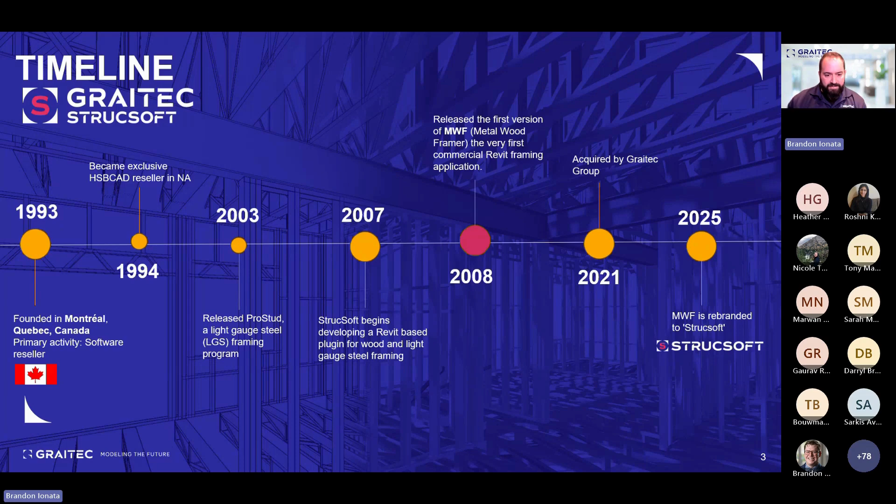In 2008, of course, when the software came out, the housing market completely crashed. So we lost a good portion of our potential customers. But we found our footing in the BIM market. Early adopters being large light steel framing subcontractors, primarily interested in coordination of interior wall partitions such as healthcare buildings, casinos, and hotels. So less of the offsite. There was some panelization, but we didn't really see many modular companies look to us immediately.

So since then, we've been working to plug a lot of the gaps I mentioned earlier in the software ecosystem, and partner, one partner at a time, excuse me. And I really want to talk about this, and I want to say partners and not customers, because in this industry, there's no off-the-shelf software that will do what today's builders want and need. As a software developer, we definitely try to get close. But in reality, the offsite industry is not standardized.

Materials, machinery, processes, they're all changing always. They're always being reinvented. So as software editors, it means we stay very, very busy. Our partners rely on us to keep the lights on and to create software that fits and accelerates their building standards and processes, automates their workflows, speaks to their machinery, and in some cases even sells their products. So really, this is a partnership that exists between us and our clients, and it's there to help them push the envelope on what they can achieve, basically, move their business forward, or at least help to. So I'll talk a little bit about the solution.

So as Canadians, we see that the digital transformation in the offsite industry is already on strong footing. Most of the Canadian offsite companies we're engaged with have already adopted or are in the process of adopting standard industry software. I'm speaking, of course, of Autodesk Revit, as it's the predominant package which offers offsite builders a lot of advantages: easy collaboration, data-heavy modeling, visualization, and a steady stream of proficient professionals entering the job market.

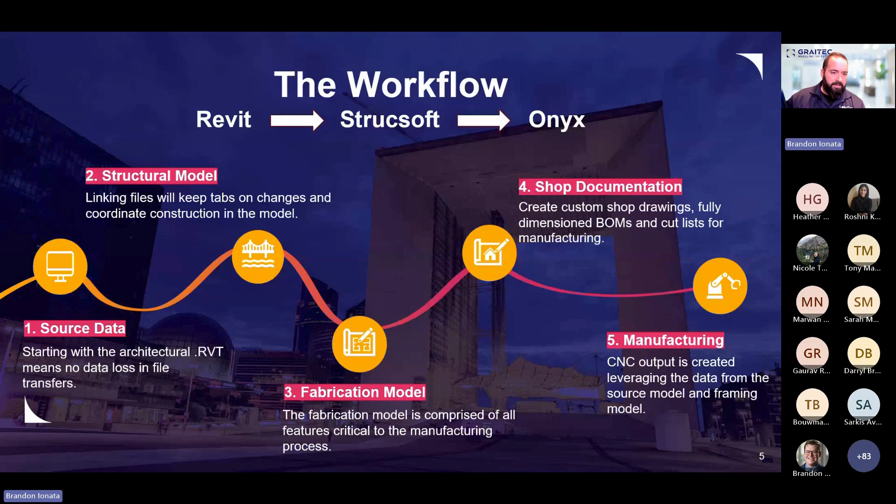So as mentioned, the source Revit model and any linked Revit files are used together to input all framing data directly in the Revit environment. Since Revit is a sandbox, structural, architectural, and MEP models can be linked to handle coordination, avoiding any errors before the fabrication begins. Automations can be easily created and create all level of detail from framing conditions, including hardware such as clips, hold downs, lifting toggles, and then document all of the components for fabrication through automated shop drawings, bill of materials, and cut lists.

All this data can be templatized and used from project to project, essentially becoming a set of company standards, building efficiency within the company. So we're taking care of a lot of the repetitive motions. And of course, certain aspects of engineering can be done. We do handle light steel truss design, which is pretty unique in the industry. And we're continuing to push forward towards a full structure FEM analysis engine in the future.

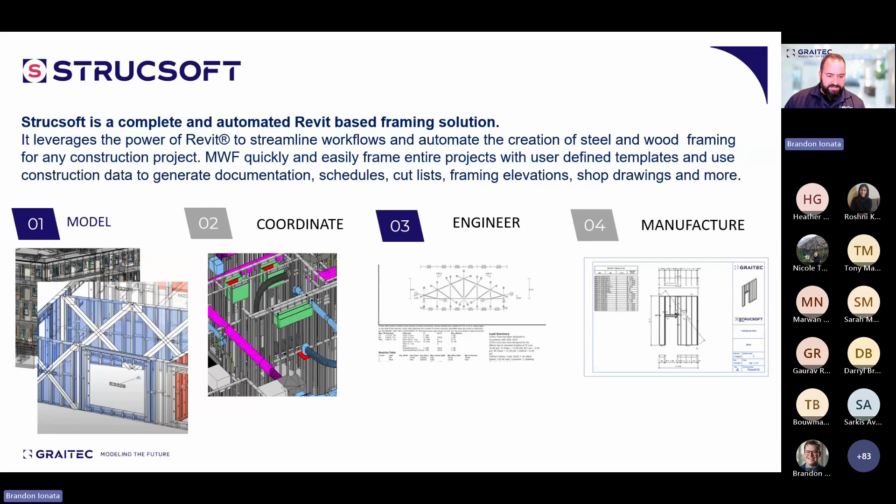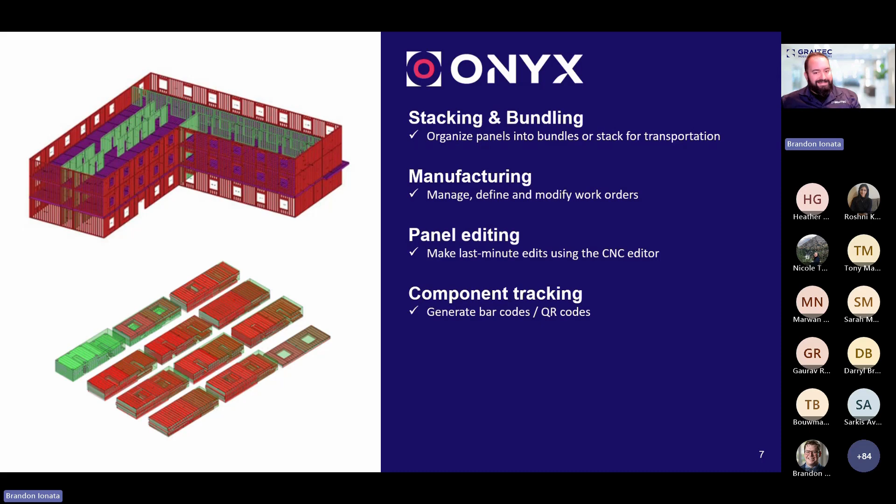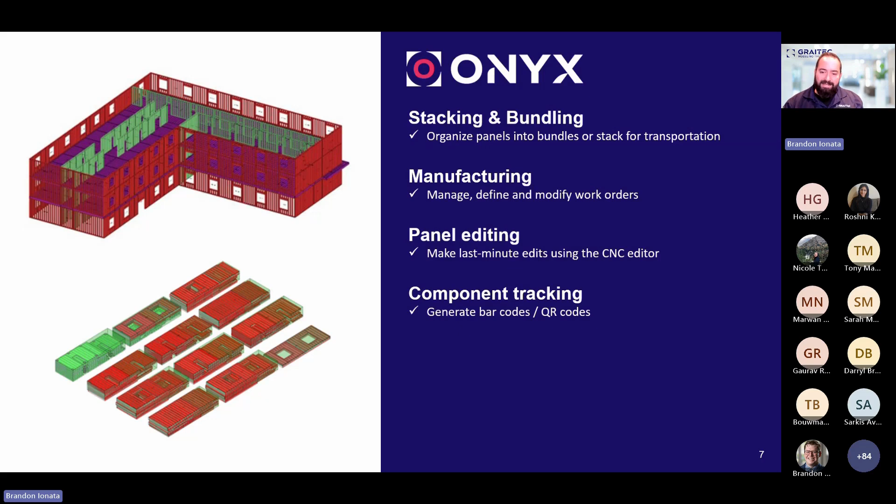So anyone that knows Revit knows that fine details such as light steel connections, nail lines, routing lines, and sheathing, and even component management for delivery is out of scope of your typical Revit model. It was a tough lesson for us to learn about 10 years ago when we tried to manage all of this in Revit. So what we did to overcome some of these issues is basically create an entirely new platform, once again leveraging the Revit data source, but allowing us to manipulate it in a lightweight cloud environment. We found that at most shops, the people needing to fine tune and schedule output files for manufacturing weren't the same people driving Revit. So we created a light browser-based system to manage this data.

And what it allows you to do is basically make edits to operations and wall panels that are edits specifically to the CNC code. And we allow you to do this visually, so you're not trying to sit there and edit individual lines of code in a text file. We can also add panels to work orders and roll orders, essentially allowing the user to schedule the order of operations for their manufacturing facility, as well as the order of erection and delivery to site. And of course, we're able to handle printing alphanumeric barcodes and exporting all of this data to CSV, text files, and I think over 24 now different CNC machines.

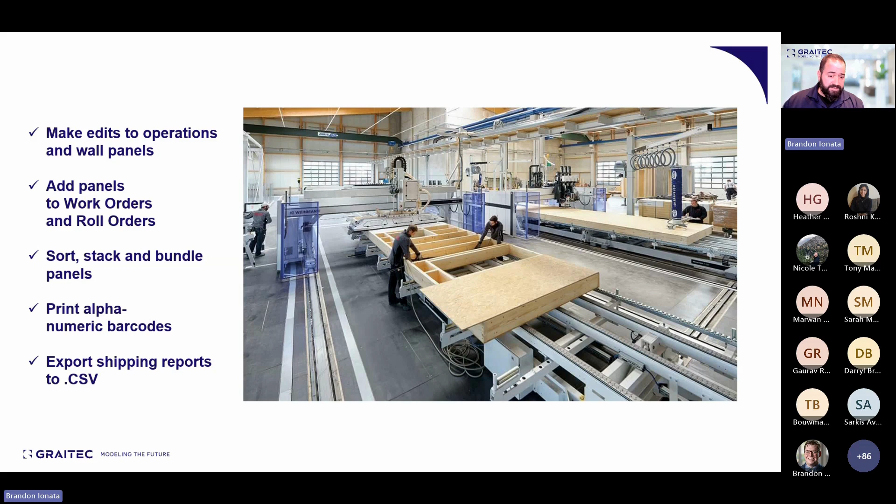So I'll talk to you about a few customers. Some of these are some of our largest customers, and it's just to show you a little bit what is capable in an offsite construction software like this. And all of these customers do build offsite.

So the first is an amazing partner that we're heavily involved with. They're called Digital Building Components, or DBC for short. They're a subsidiary of one of our earliest adopters, with whom we've been working since 2008. As a company, DBC focuses on delivering an engineer-to-order finished exterior system that is high performance and quick to install. Their projects are typically big, hundreds of panels big, and what sets them apart is their process and their people. They're emphasizing the creation of a fully coordinated 3D model in Revit, which feeds data downstream to their machinery and shop floor.

So their innovative process keeps errors in the field to a bare minimum. Their factory processes focus on safety and efficiency, and these guys can churn out thousands of panels in a typical year. What's amazing about a partner like DBC is they're always pushing the envelope on technology, streamlining design to reduce their design phase by almost 80%, while increasing level of detail in their models.

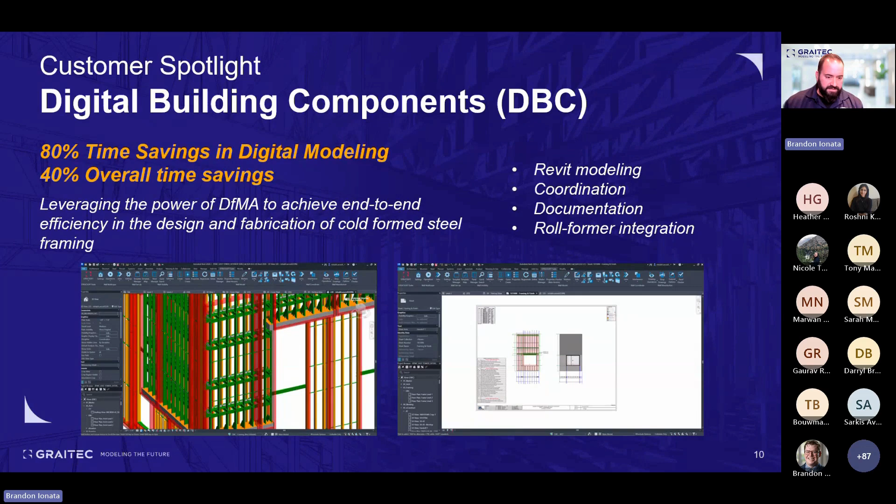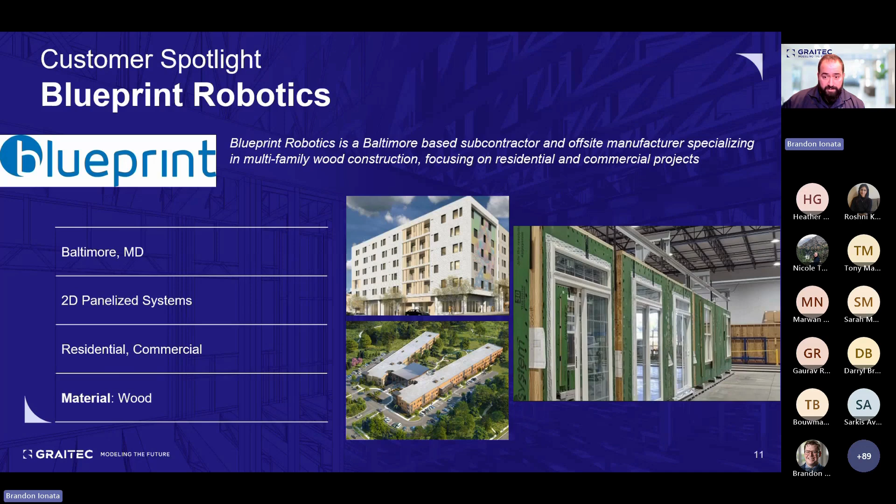And they had a particular challenge for us, which was to flip the switch on their old software system during a live project. And this is what I was mentioning earlier about being that trusted advisor and really being a partner, not just a solution provider. We actually put more than 25 developers, technicians, and project managers on the project, transforming their DFMA process in just months. Moving them from their old system, we enabled them to increase productivity 2.5 times.

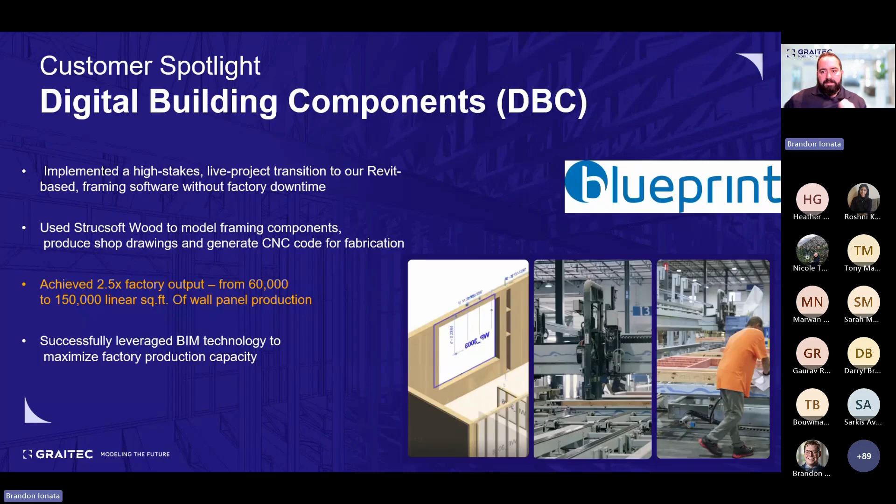The last example I'm going to show you is one to help people think outside of the box. We tend to think of offsite structures as quite bland. We can see that, in this example, obviously there's no limitation. So obviously the Las Vegas Sphere, I think a lot of people know about this structure by now. Our client, Performance Contracting, completely coordinated and detailed the project to be output onto HCL roll formers.

So just some stats from the project to show you the scope of what was done. More than 8,000 total wall and floor panels were modeled. 132 separate wall types, 33 separate floor types, and more than 173 unique opening configurations were used in this project. So quite massive.

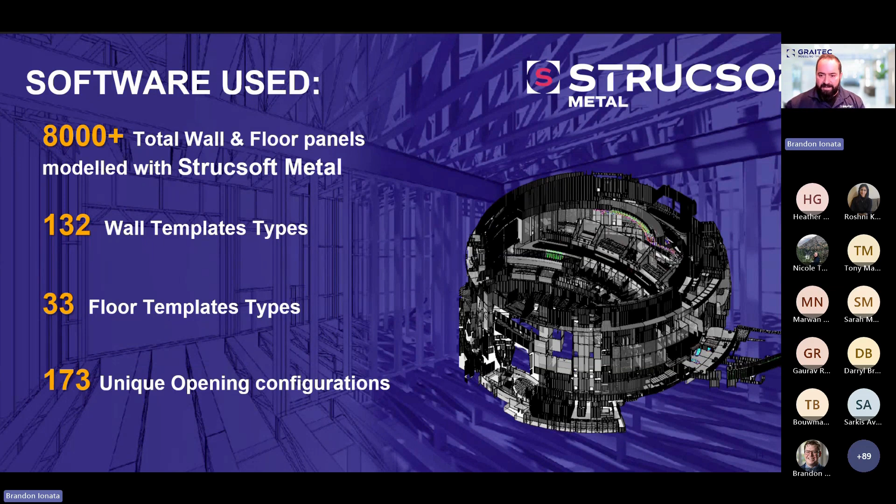Of course, full disclosure, these examples are not Canadian companies, unfortunately. Due to time constraints, I didn't get the releases I wanted to speak about some of them. But we did bring with us one of our innovative Canadian partners, Tony Marcantonio, CTO at Metaligna out of Arnprior, Ontario. So Tony, I'm going to end this and I will pass the presentation off to you.

Brandon, appreciate it. I guess I'll say a few words about Metaligna, who we are, what we do, where we're headed, and then talk a little bit about our LGS building systems, and then we can probably send it back to Brandon after that.

So a little bit about myself. My background in construction comes from family. My parents immigrated to Canada early in the 60s. My father started one of the first drywall companies in Ottawa, and from there I was a construction brat born here. Basically went through university, got into engineering, got into structural, and then started with my family company in the drywall business. So LGS, light gauge studs, pretty much has been in my blood for a long time.

I'm just going to share my screen here. Sorry, Tony, it's Brandon Searle here. I'm not sure if you have your camera on, but we don't see you either. Okay, give me a second. I'm just going to turn the... We can see the presentation. No problem. Okay.

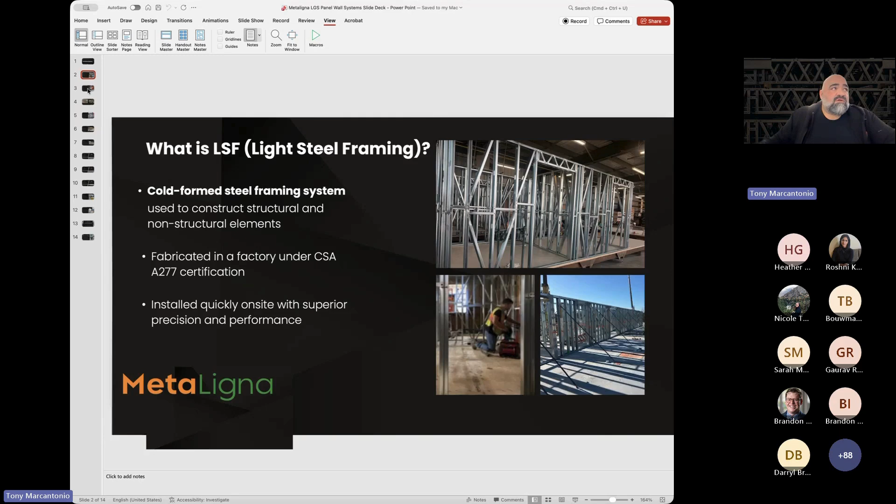We are generally able to install 40 to 50% faster than if you were doing this on site alone. So our process is fairly quick. Usually a 6-story, 10,000 square foot footprint, every floor is about 4 months to install. So like I said, we're 50% faster than conventional construction. We have a more predictable cost because we own the entire BIM stack from architecture to structure right down to output. There's very little unknowns. We work those out in design, and that alleviates a lot of change orders and extras that some clients face.

Big benefits of using LGS components is obviously we are non-combustible, which brings our insurance premium down, and the high strength-to-weight ratio, which also helps with the dead loads on the site. So we're able to shrink our footings, shrink our shear walls, and get very lean in the design process. There's very little on-site waste, and again, CSA certified.

We work with a lot of different floor systems depending on what the client is looking for. We're generally involved early on with the client to figure out what their pain points are, where they have issues with their build budgets and so on, so that we can offer the best possible solution for them. We use a product out of Bailey called ComSlab. We can produce our own open web joists. We also have a C channel that we produce as well, that we do into a panelized system for floors. We can also use the basic systems that are out there, Can-Am, Nucor, all those types of joists for floor systems, and we offer all of them with our building systems.

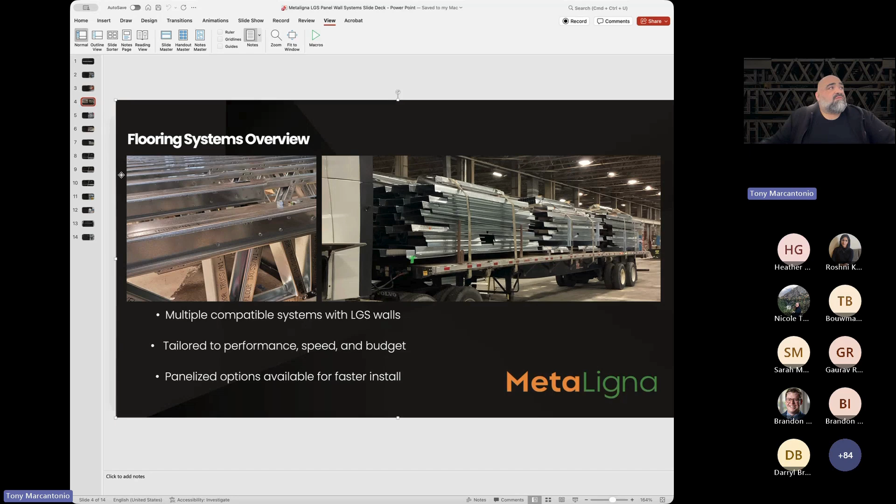The ComSlab composite floor system is really the one we like using the most because it offers us a lot more engineering prowess. It's a long span system. It performs very well. The concrete allows for a good diaphragm and allows us to spread out loads, cantilever loads in other areas as well, and gives you a fire rated assembly right away. And all of this again is modeled through BIM, through advanced CNC methods. And we prefab and panelize all this in our shop so that we're able to send it to site with very minimal on-site labor.

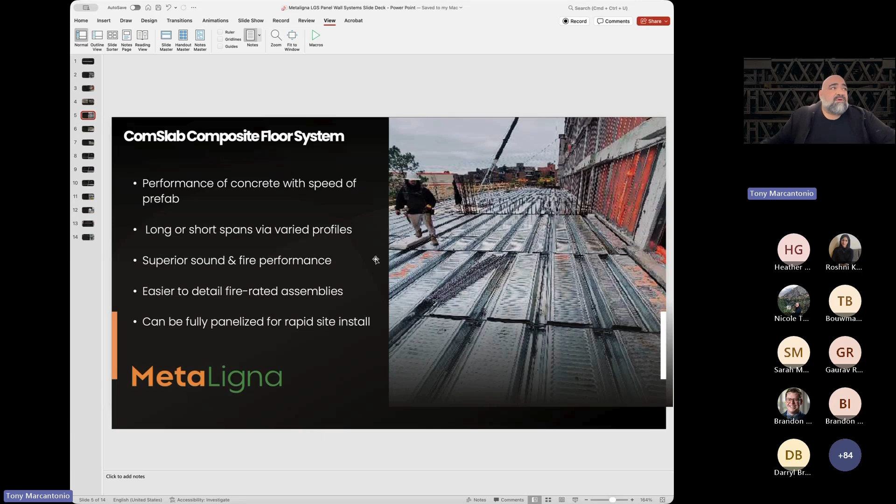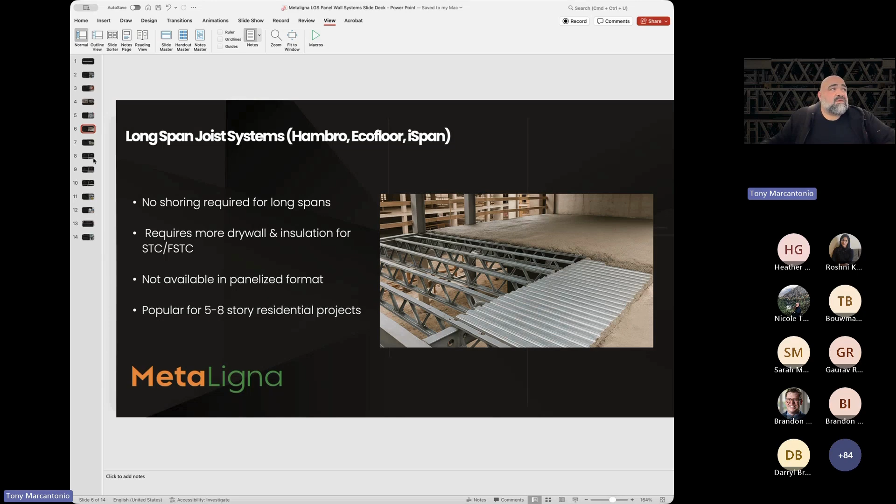We also have the long span joists with Hambro EcoFloor and our own iSpan as well, and that allows us to do different toppings, whether it be gypcrete or concrete. We have quite an extensive expertise in long span trusses, utilizing some of Graitec's tools, also our own engineering, MTAPs, and so on. This is a truss that's up to 68 feet, and this was also significantly load bearing. This was for a long-term care in the Mohawk region. And we're able to produce these in our shop. Our shop is a little over 160,000 square feet, and we produce all sorts of different size projects.

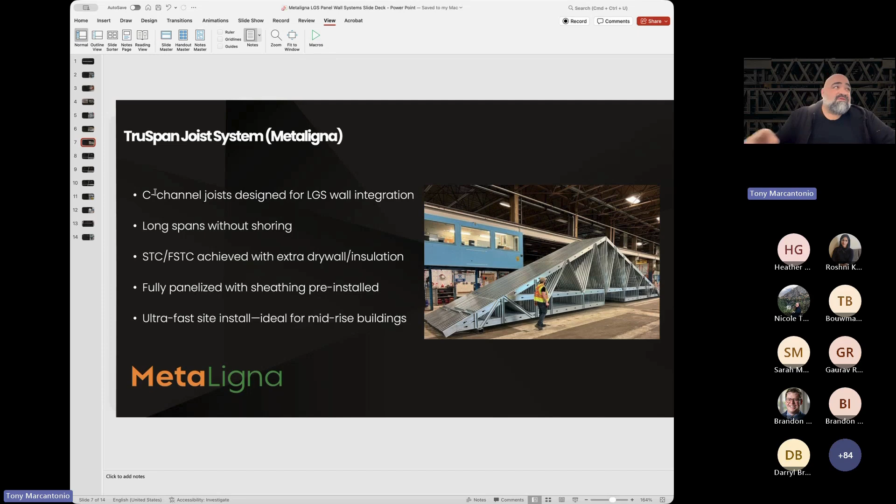The big comparison of why we decided as a building company to panelize specifically in steel versus wood was obviously the non-combustibility. It's safer, it's more insurable. They're straight, they're true, they always stay that way. They don't warp, they don't twist, and there's no mold. So for us, when we're talking about offsite, about being precise, I like to use the analogy that Ford switched to a steel chassis after the Model T because they needed to get into mass manufacturing. When you're dealing with that, you need finite numbers, and wood doesn't give you that.

Wood is also combustible. It has code requirement limitations. It's an inconsistent material and susceptible to moisture damage, especially in Canadian winters. Having wood on site, you're going to have freeze-thaw moments. You're going to have some flexibility in the structure, whereas with steel you don't.

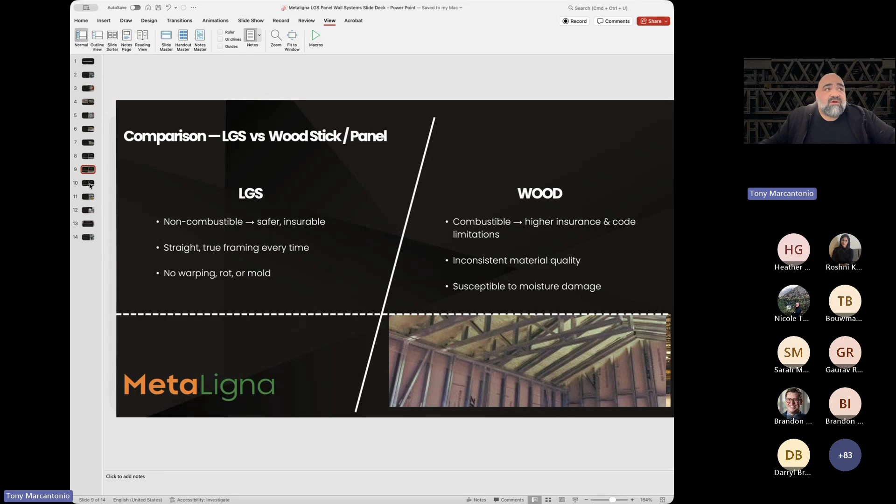Other hidden costs versus traditional builds, and why we've kept to steel on our side for rapid housing and so on, are obviously daily labor costs of having a fire watch, and delays due to weather or inconsistency of trades is a big one. The rework and quality issues: when we're doing all of our design in house and we're able to leverage Revit, there's not much rework that ever happens because everything's been planned out and everything's been coordinated.

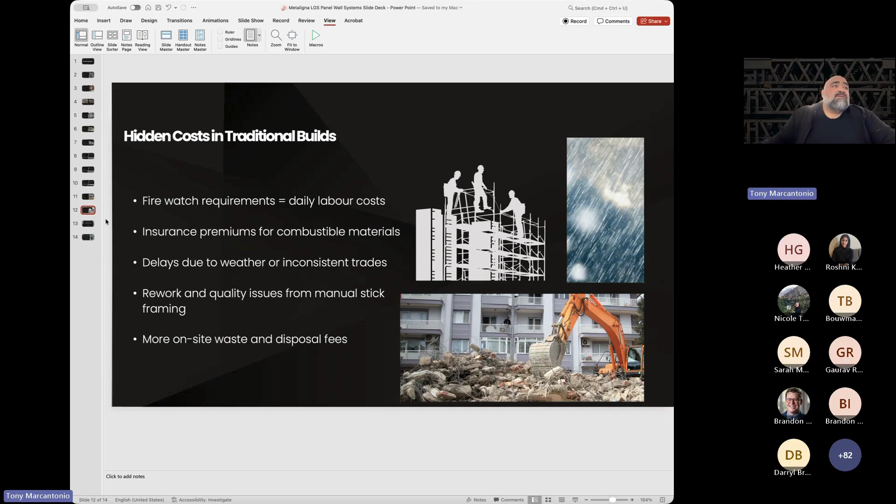And that's what we do here at Metaligna to help the building industry get a little bit faster, get a little bit more product out there, and house a little bit more people. I'll turn it back over to Brandon.

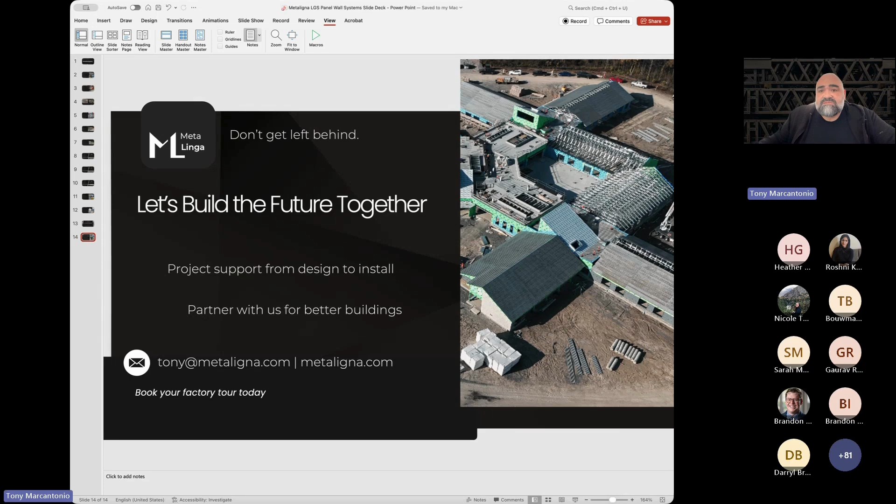Perfect. So, not sure, Brandon, did you and Tony want to join now for the panel discussion, or did you have a couple more slides you want to? No? Okay, yeah. Cool. Yeah, we said turn back over to Brandon. I was like, oh, did I miss something? Too many Brandons. Yeah, exactly.

Okay, cool. So we got a few questions that came in there, and there's more continuing to come in. So maybe I'll go to you, Brandon, first. This question came in asking about Graitec's plugins or apps for precast concrete modeling and detailing. We've worked with a few companies, and most of them are using Nemetschek or Trimble software. I'm not sure if you guys have something similar to, say, Tekla Structures or something like that.

Yes, we have a number of different solutions at Graitec. One of our biggest products in the past was actually Advance Steel, which we then sold to Autodesk. We do still have Advance Design, which is the structural analysis package, but more towards the topic, specifically in rebar, we have an excellent rebar detailing tool, which is just absolutely phenomenal. That is part of our Power Pack series of tools. It is also Revit based, and just like StrucSoft, we're able to take all of that from design out towards fabrication, so it manages the whole MES portion of it as well.